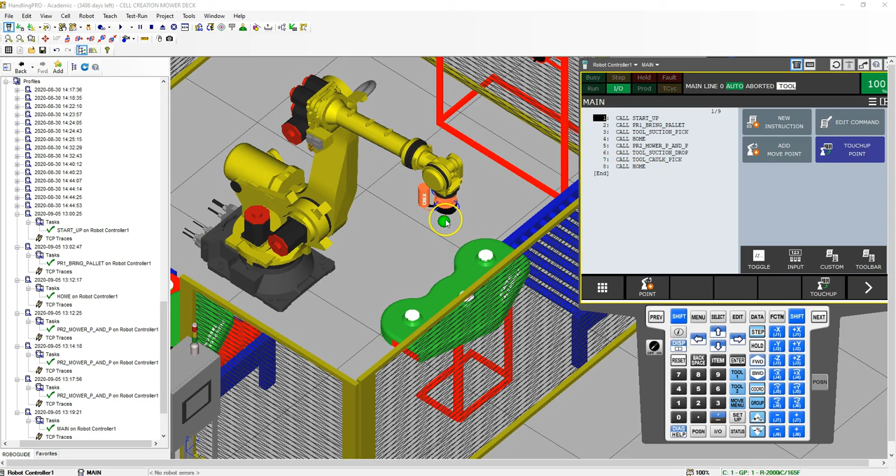Welcome to video 7 of our mower cell creation. In the previous video, video number 6, we started the program, and this is what we have gotten done so far, which is the startup, which is initialization of all our different cells, and then we are grabbing the pallet, picking up the correct tool, grabbing our deck, moving it onto our table, and then we just grabbed the Caulk Gun. So now we're going to go into probably one of the harder programs to do, which is our Caulk Gun.

So if you notice on our Caulk Gun, we have the tool offset here to be the end, and it is outside, so it allows us to do the caulk, and we're going to run a bead of caulk around the outside edge of this opening. So what I'm going to do is I'm going to make these items not visible right now.

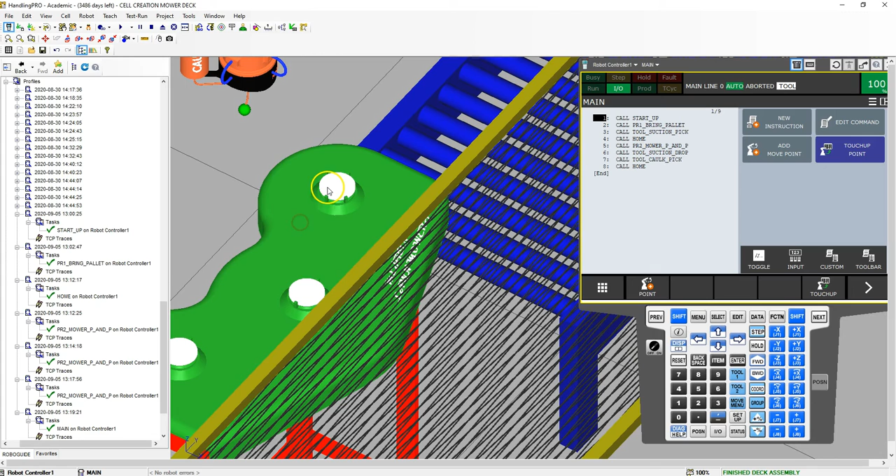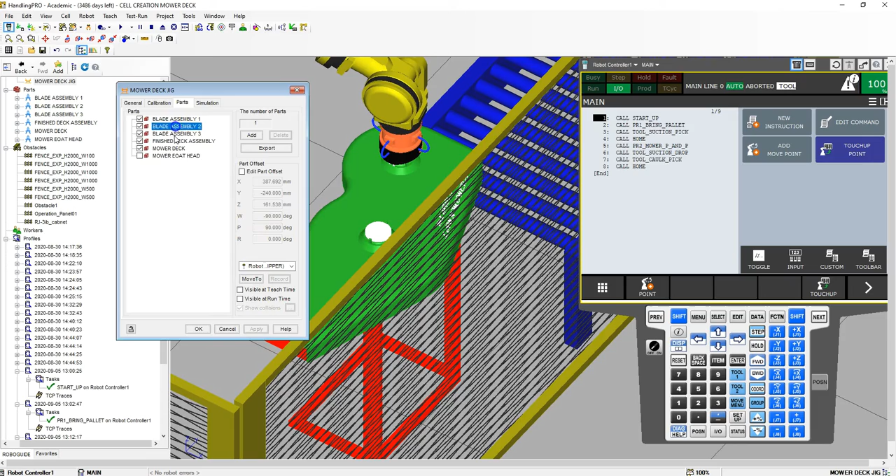So I'm going to go inside that tool part, and I'm going to go down to the parts and blade assembly number 1. I'm going to turn off the teach time for now. Same thing with number 2, and then number 3 as well. Hit OK. And then we're also going to turn off, because right now we see the full mower deck finished.

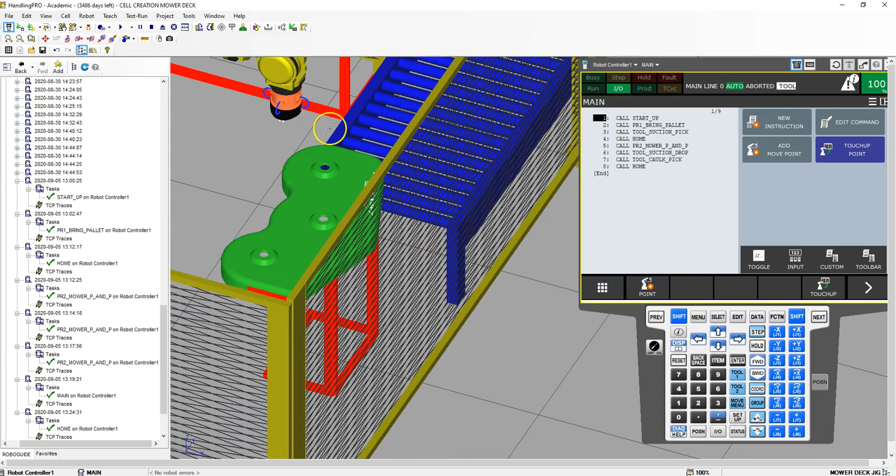That's what you see, these items here. Let's go to the finish mower deck, and let's turn off that teach time as well. So now we just see the raw mower deck with the holes inside of it. Now what I'm going to do is just bring my robot to home here. And then I'm going to make sure that we have the correct head in here.

So we're going to go to the Caulk Gun head, and let's create a new program. And this is going to be our program number 3. And this is going to be caulking. So inside here. All right, so now what we need to do is make sure that we are on the correct U tool, even though we should be, but again, I like that redundancy. So we're going to arrow over, and we're going to go offset frames, tool number, which is our caulking gun.

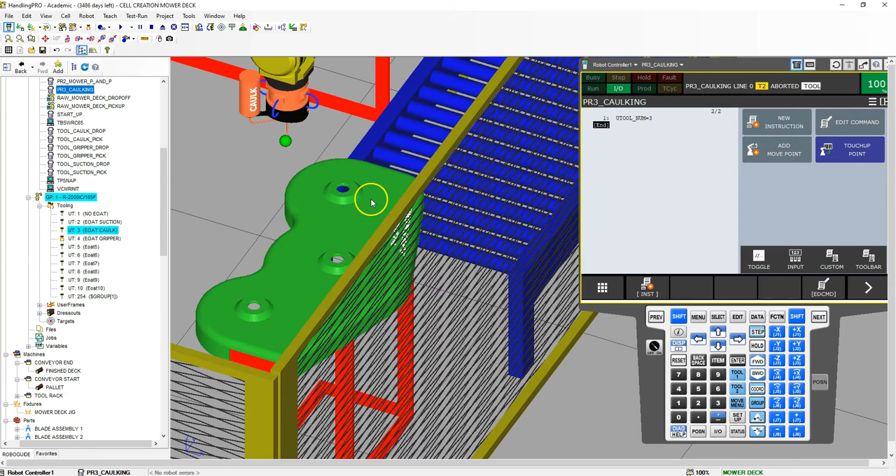Now that we have that, let's turn the position register to be the correct numbers. So we're going to set up the tool offsets. So let's go to new instruction, registers equal to position register number 3, which is our tool offset. Number 1 is going to be at 0. Even though we did it in other programs, we just want to make sure, again, the redundancy is there. Just in case we need to change it somewhere else, it won't have to affect everything else.

Okay, so always assume that you're going to be changing something so that you don't have to go back and change it again. So we're going to make our tool offset of 200 on this program. So next, because we have 3 holes and they're going to be the exact same programs, we're going to use a tool offset to do the jump out to go to each one of these sides, so that we don't have to reprogram each circle over and over again. So we're going to set up another position register number 7 to be our caulk offset.

So let's go to data, and I'm going to shift up to number 7, because that's what's opening right now. And I'm going to enter in there, and this is going to be my caulk offset. And I'm going to just go shift record for now. And if you want to, you can go inside there and just zero out everything. So everything's zeroed out.

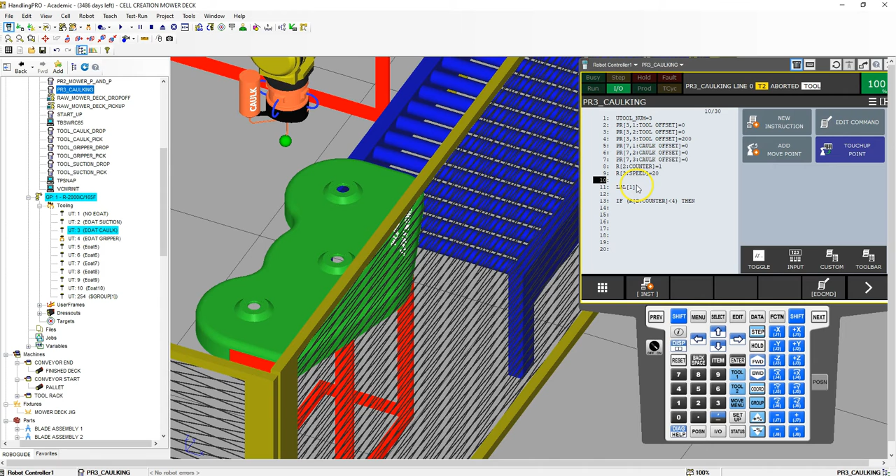Now, before we do any move points, let's just make sure we're in the correct user frame. So we'll add, say, 2 up here, and let's just add a user frame. We'll just use the world one that's part of RoboGuide, which is 0. User frame number 0, just to make sure that we are in that right away. So let's go to the setup, frames, and here's our tool frame. Let's go to type. Let's go to other, user frame, and right now we are in user frame 0.

And if you want to, you can go set IND. Okay, and we can go set IND to 1. Okay, user frame to 1, and then we can go back into that program and just make sure that we are in user frame number 1 when we do that. So whatever we do, we just have to make sure we match user frames. Now, we didn't set up or change anything, so basically it's just the world frame that we're going to be using. So let's go to this position.

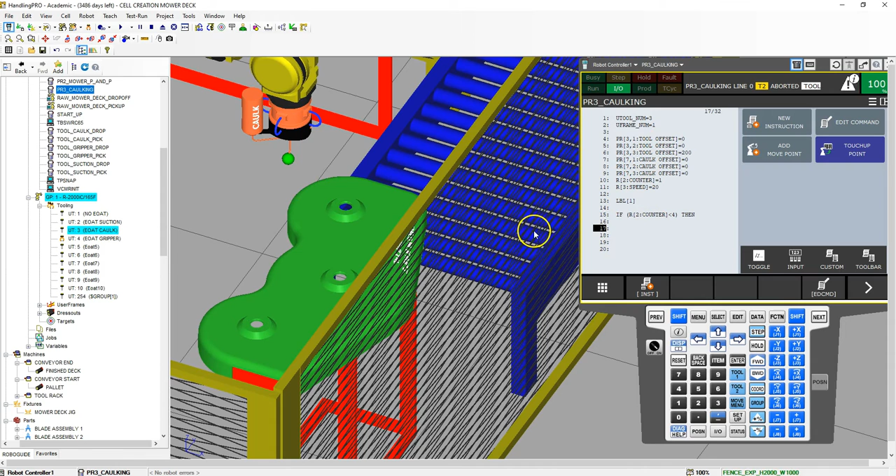So I'm going to go to position here, and I already found out where it's at because when I drew it in CAD, I know the actual numbers. So I'm going to go X, Y, and Z, and I'm going to go 1800, -29, 260, 0, 0, and then 0. So if I go move to, now I'm at that first position in the correct area.

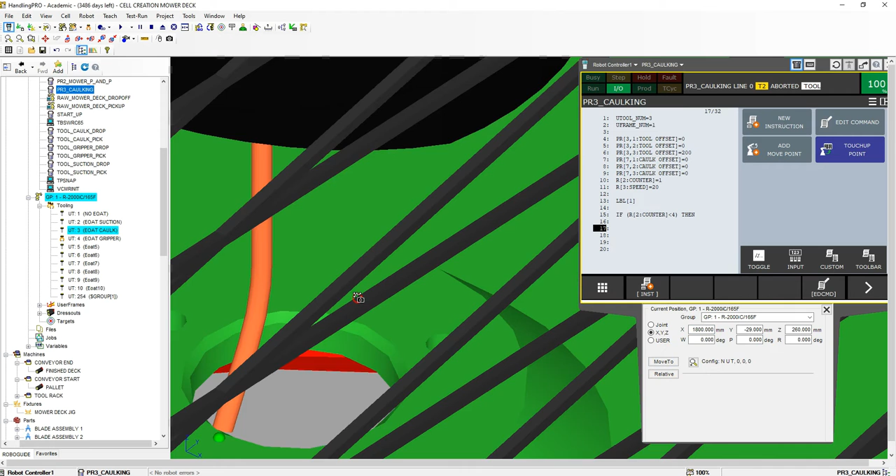Now I did this because when I drew this in computer-aided drafting, I found out all the positions of this opening, and then I just converted them from the world actual mode. So I zoomed in here, and this is going to be our first point. So I'm going to actually go down a couple here, and I'm going to add a move point, and we're going to linear down to this position from a safe position. So I'm going to go linear movement, and this is going to be our point number 1.

And we're going to move down this pretty quickly, 500 millimeters per second, and then we're going to arrow over, use an offset position register, not a tool offset. So the offset allows us to move all those points over a certain amount. So we go offset position register, and we're going to use that number 7, which is the caulk offset. So right now it's set at 0. So 0 means we're not offsetting incrementally right now. It's just going where it's at right now.

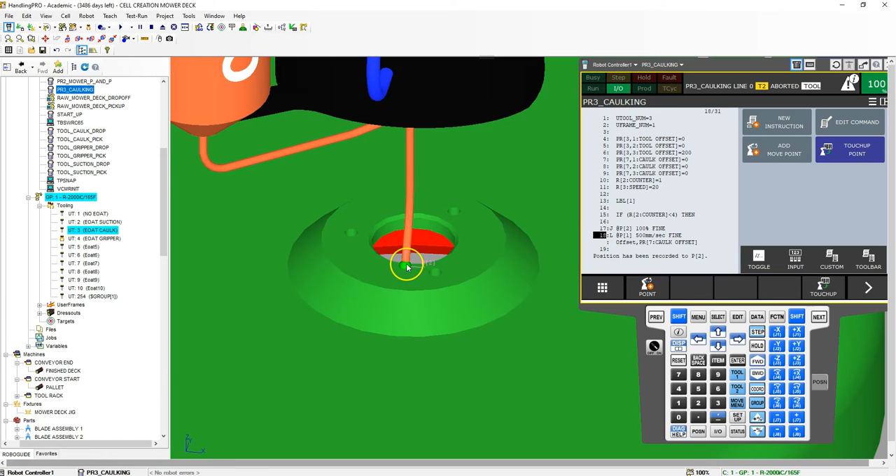So let's do an offset upwards for this. So I'm going to go up here to row 17, and I'm going to go add move point, and we're going to joint movement down to this position number 2, and let's bring this up, say 20 millimeters. So we're above it, and let's record this, shift touch up, there we go. And now we're going to add that offset position register. Offset position register 7.

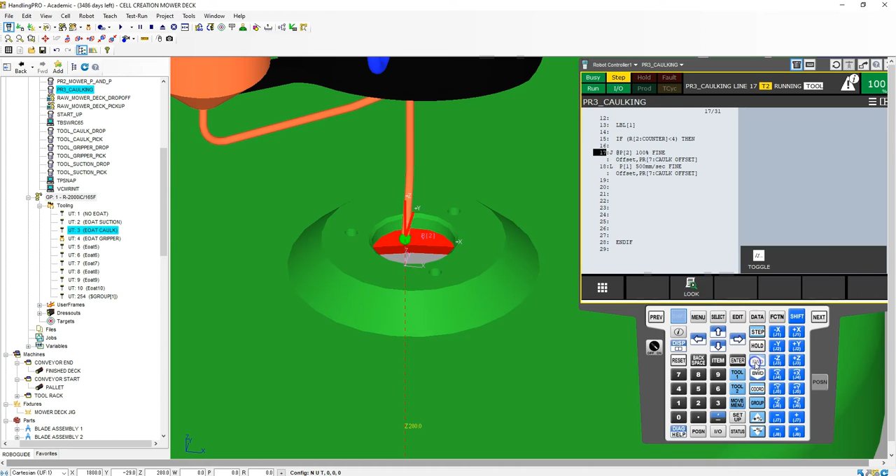So we're up here, and I'm going to go shift forward, and it's not letting me go forward until I get to that position here, just because I don't have that end if. So what I'm going to do is just drop my end if down here somewhere. There's my end if. So I'm going to reset. And right now we're right here. So I'm going to just go shift, I'm in step mode, forward. And now I'm going to go down. So now I'm at that position. And now we can start programming this all the way around.

Now I know the numbers already, but we can also put in the other items as well. Okay, so we're going to do a circular path around this, ending pretty close to the end, because we won't be able to go all the way around because we'll hit the limit error on our caulking gun. So I'm going to just go down to, say, 19 here, and we're going to do a position circular path. So I'm going to go to my center position here. I'm going to just go to position because I already know what these numbers are. I'm going to type in these numbers.

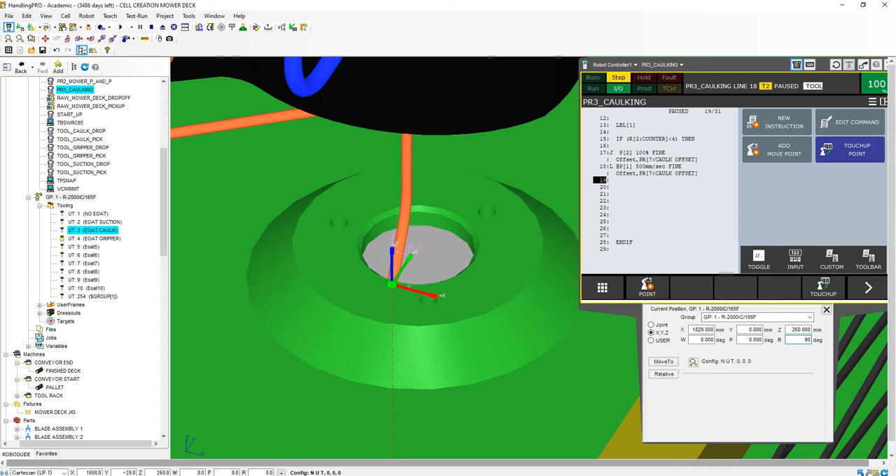So the X component is going to be 1829. Y component is going to be 0. And then the Z component is going to be 260. Now we are going to have a rotation of 90 degrees on this because we want to follow along with the caulk coming out along the outside. So when I move to, we are now in the correct position for our caulk gun.

So let's go in here and let's do an add move point. We're going to do a linear continuous. We're going to switch this to circular path. Okay, so we're going continuous on here. We're going to add the circular path, and we're also going to add the position offset here. So we're going to offset position number 7, because then we'll be able to move it over to the next point. So now we have to figure out what is that next point.

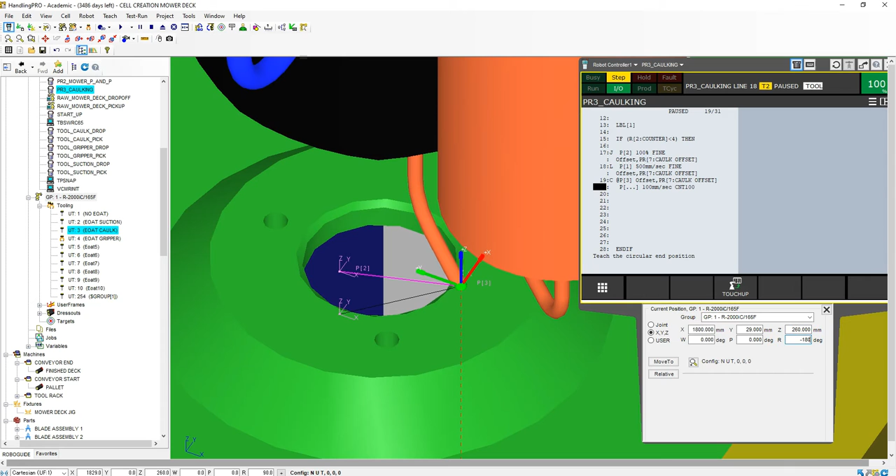Okay, so the next point is, let's go to position. And again, we found this out already through my CAD program. So this is going to be position number 4. And position number 4 is going to be 1800, 29, 260 remains the same. And then I'm going to go negative 180 for my R. And when I move to, it should be in the corner right here.

Okay, so now let's do our shift touch up. So this is position 4. We're continuous on there. And let's add our offset, position register 7. Okay, caulk offset. Again, this allows us to shift it over to the next hole. Let's move on. So let's go to the next point. So I'm going to go position. Again, I found this position already in CAD when I drew this. So my X component is going to be 1771.

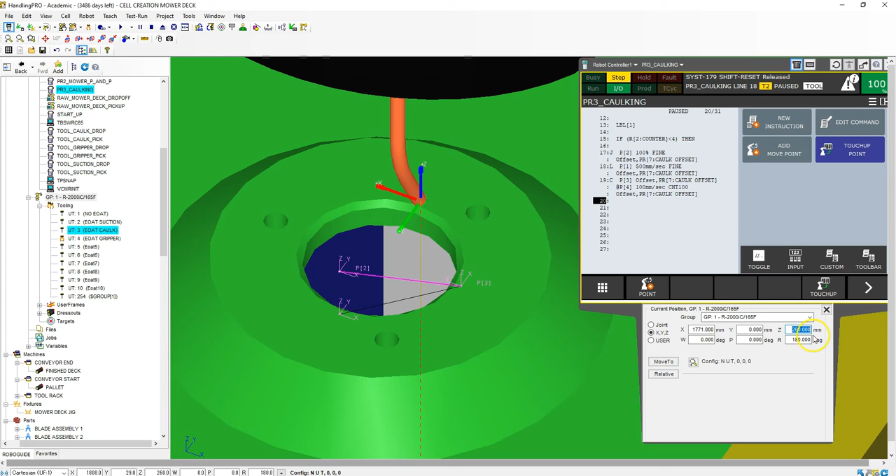My Y component is going to be 0. My Z component is going to be 260. And my R is going to be negative 90. Now we're in that third quadrant.

Let's add that point here. So add move point, linear. And we're going to do a continuous linear to the next point. Let's add that offset. But first, let's actually add the circular. There we go. And then add the offset, so we're going to go offset position register 7.

So now we're at that point. Now we're going to move to that last point. So let's go to position, and this is going to be position number 6. And that number is going to be 1794, negative 28.559, 260, and then negative 25.

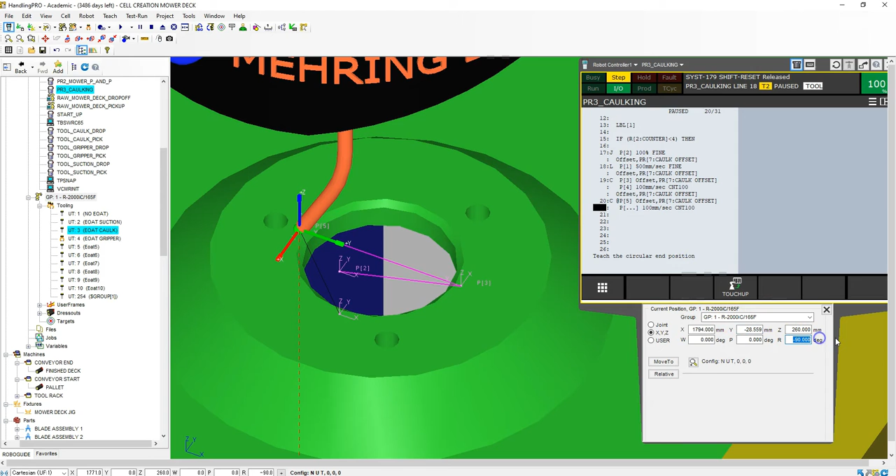Okay, so again, we're not going all the way around. Otherwise we hit a limit error. So we're going to get pretty close to that starting point. Again, that caulk will squeeze out to fill in that gap if we need to.

So I'm going to close this out, and I'm going to go shift touch up. So there's my position 6. And we want to actually stop here. So instead of the continuous choice here, let's go fine. We want to stop at that point, not continue on. Otherwise, it'll go continuously up to the next position.

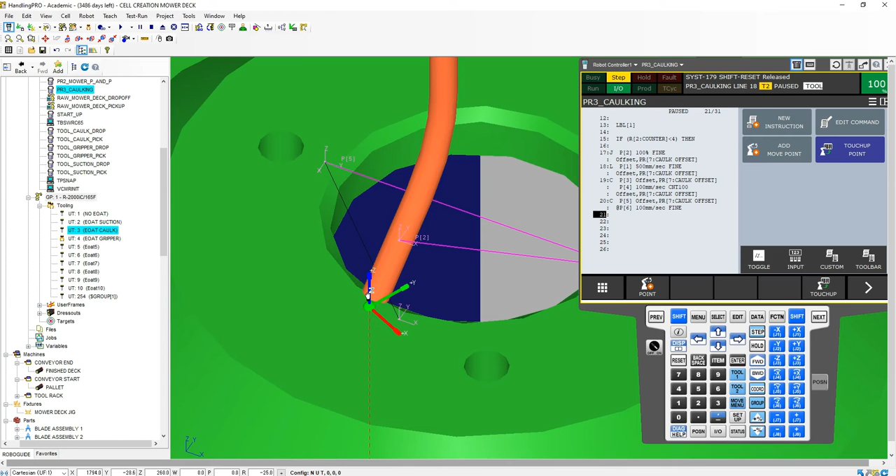Let's move up to the next position. I'm going to bring this up 20 millimeters. And then let's do a linear motion up to that point, do it at 500. And we're going to add that offset as well here, so we're going to offset position register 7.

Now we got to make sure we do that for endpoint 2. So each one of these should have the offset position register to allow us to incrementally offset this over. So now that we have all those positions, let's go in here, and anywhere you see a movement, like right here 100 millimeters per second, that's where that speed register came in.

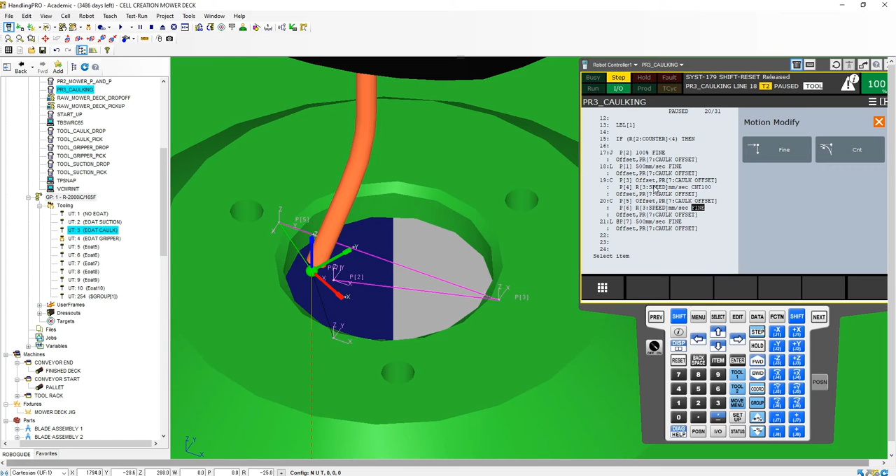So let's go register number 3, which was speed. Right here where it says 100 millimeters per second, we're going to use register number 3. So register 3, register 3. We should have 2 registers that are set at 3.

All right, so I'm going to shift up here, and I'm going to run this to see what this looks like. But first I'm going to run it to home. So I'm going to just shoot it to home really quick. And then let's run the actual program, because that's disappeared right now.

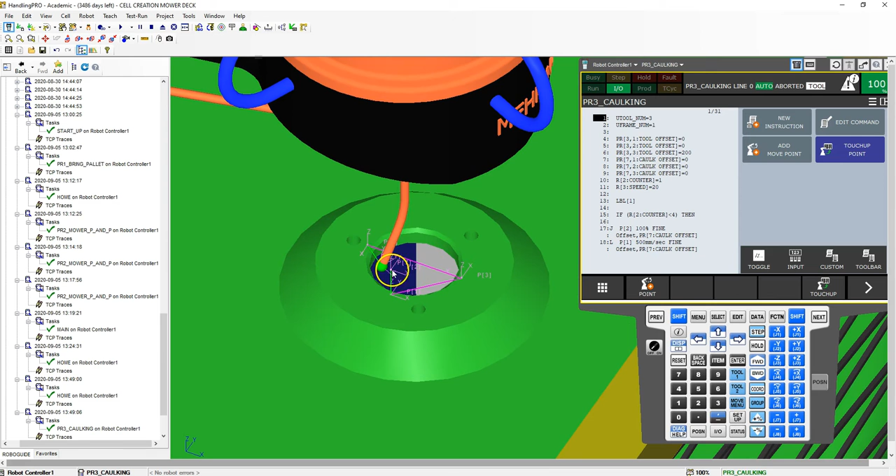All right, so we know that it's over that position. We didn't get any errors. It moves up. Okay, this disappeared because it's not placed yet. But when we actually place it, it'll remain there and we should be all good.

Okay, so I'm going to move down to the bottom here, and this is our program. So now what we need to do is add one to our counter. So we're going to go new instruction, register plus 2. We're going to go register number 2, which was our counter, and that's going to be equal to register number 2, which was what it was previously, and we're going to add 1 to it.

Okay, so now that we added 1 to it, now we need to make a decision. If our register 2 is equal to 2, which means we're on the second hole, we need to shift that offset over a certain amount. So we're going to do that, the then statement: new instruction, if select, then. So if register number 2 is equal to 2.

So if it's equal to 2, and I'm going to add some lines here. So if it's equal to 2, then we need to reset our position register number 7 a certain incremental amount. So I'm going inside here. If it's equal to 2, we're going to set registers equal to position register number 7, which is our caulk offset, which is now at 0, 0, 0, 0. We're going to set the X position to be the next increment, which we found to be negative 161.537, to be in the center of the next position here. And that I found through CAD.

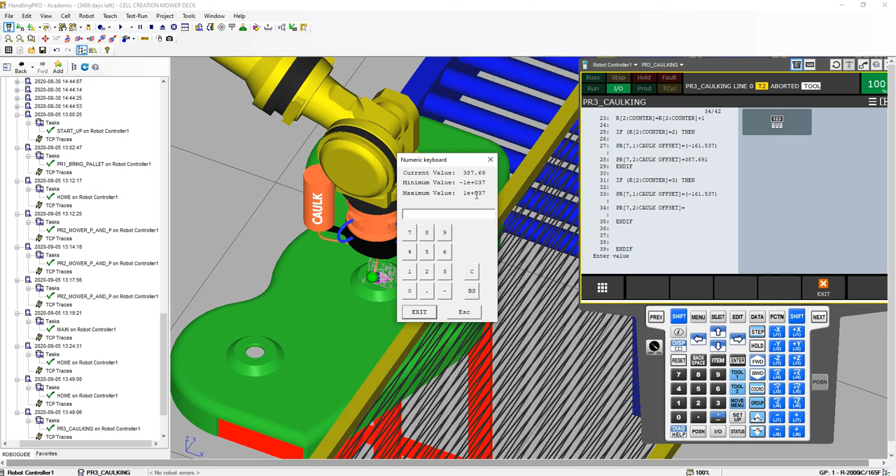Okay, so now if our counter, so if register number 2 is equal to 3, let's find that. If register number 2 is equal to 3, then we need to shift this position register to negative 161.537, but this one needs to be negative. So I just go over here and make it a negative 387.691. And because we use the offset, this will shift that register over to that area.

Okay, so we have our end if, and then now we're going to have our jump 1 inside here. So jump to label 1. So down here, because we want to constantly jump over, we're going to new instruction, and we're going to jump label 1. And then we have our end if. So we have our end if, end if.

So if I arrow up here, I'll show what's happening. So we go through our label 1, and only if this counter is less than 4. As soon as it becomes 4, it does not do this if statement. So it skips this entire line all the way down to line 40, and it ends the program. As soon as it stops at 4, the program's done.

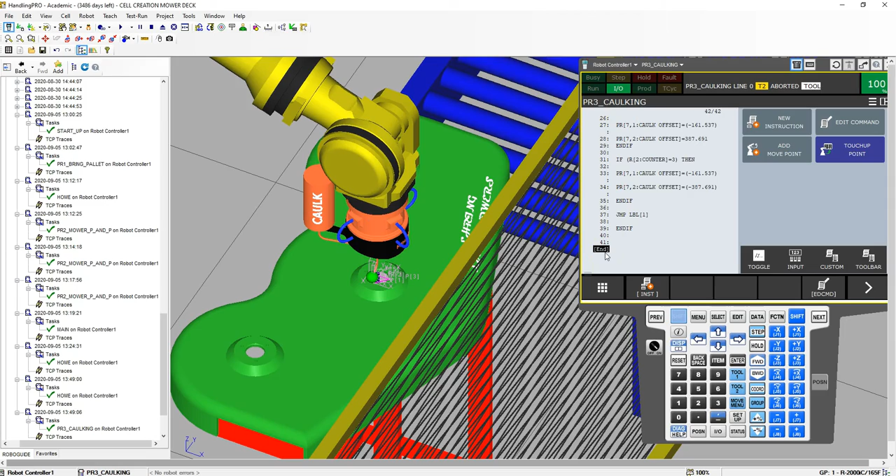So if it's not at 4, then it goes into that if statement and jumps to the beginning, checks. If it is, continuously goes through, jumps to the beginning. If it's less than 4, continues, jumps to the beginning, and then checks to see if it's at 4. If it's at 4, then it pretty much goes all the way down to the end. So let's actually run this and see this program work in the full program.

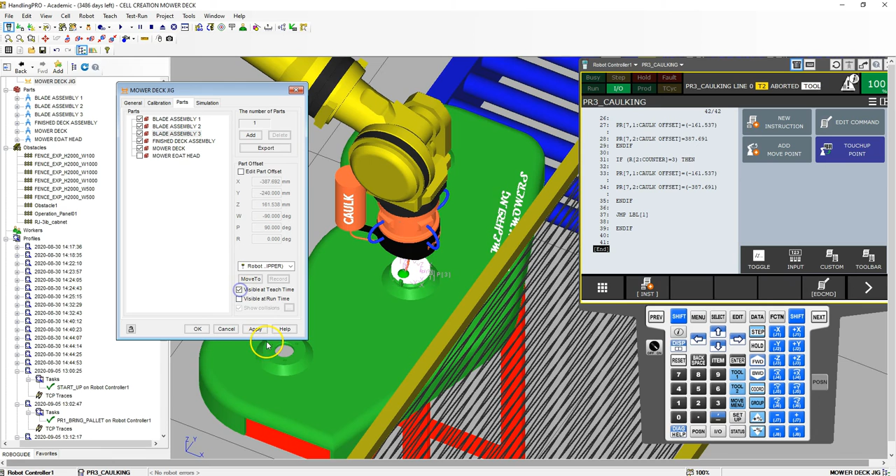So I'm going to turn on those other position items. I'm going to double click this rack here, and go to blade assembly number 1, and make it visible at teach time, apply, teach time, apply, and then the finish mower deck as well, apply. So now that those items are visible at teach time, hit OK.

Let's add this to our main program. So let's go to select, find the main program, and go down to new instruction, call program, and this is going to be our caulking, which is going to be PR3, program number 3, caulking. Once we're done with the caulking, then we're going to put that caulker back into the tool rack. So might as well do that program right away.

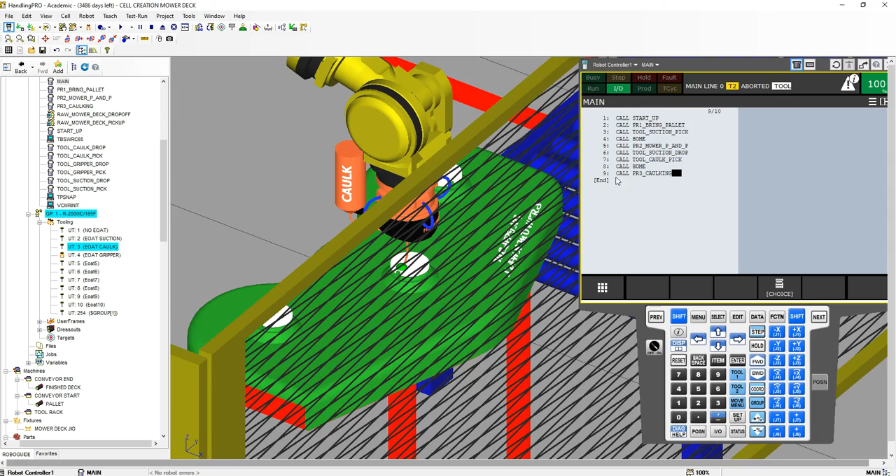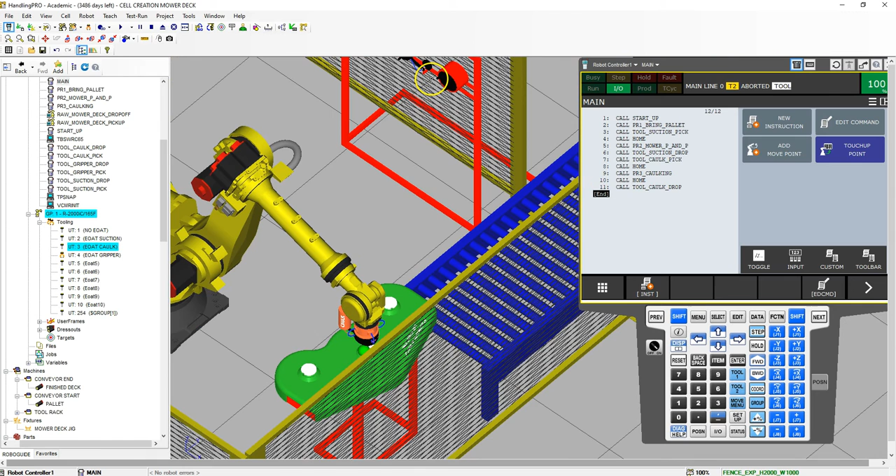So once we're at this position, let's just make sure that we're out of the way, that we don't run into anything. So let's call it a home position, call home. And then we're going to drop off that caulk gun. Let's go down to where it says caulk drop. And then we need to grab the blade assemblies, and that's where we're going to use the gripper. So let's call the gripper right away while we're here. Call gripper, so tool gripper pickup, and then let's go to the home position.

So notice how the main is all calling programs. There's no points in there. It's all calling outside sub programs. So let's run this and see what it looks like.

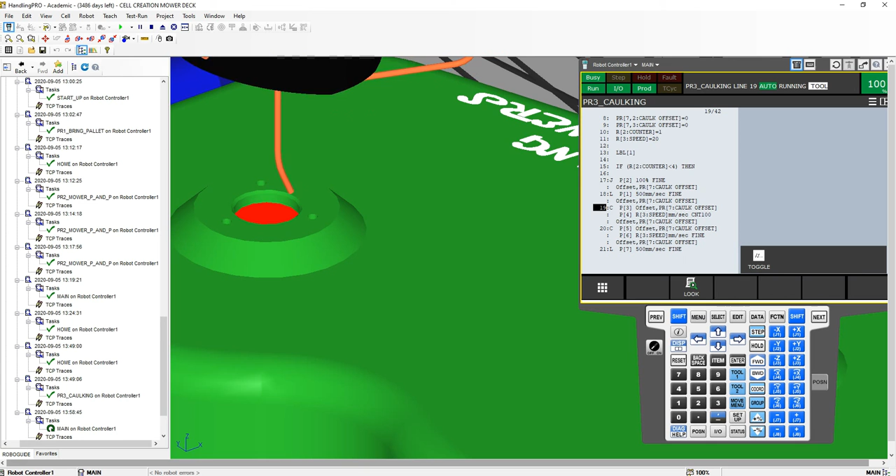There we go. So in the next video, we will grab the final pulley systems. We will pick up this, put it onto the conveyor, and then restart everything as if this was part of an assembly line.